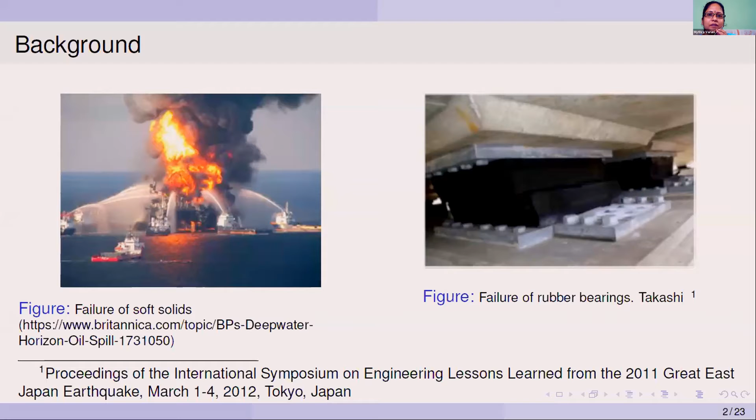So in this presentation, we'll focus on finding the onset of damage in quasi-brittle soft materials. All materials cannot be classified into entirely ductile or entirely brittle. Some brittle heterogeneous materials such as rock, concrete, ice, ceramics, various composites, and some soft materials like synthetic hydrogels, elastomers, and biological tissues come under this category of quasi-brittle materials.

This strain softening is basically the degradation in material stiffness with increasing strain and is observed at a continuum level in damaged quasi-brittle materials.

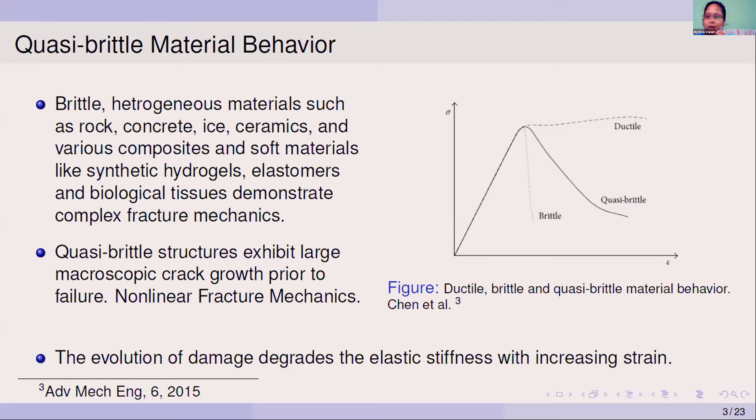So let's now turn to the modeling of this damage onset in these quasi-brittle materials by addressing their constitutive behavior of nonlinear brittle elasticity. As we know, a hyperelastic constitutive model is developed to describe the nonlinear elastic response and derives the stress-strain relation for the elastic material from a strain energy density function.

Traditional hyperelastic models are aimed at describing the intact material behavior and allow for unlimited increase in strain energy. However, we know that no real material can accumulate unlimited strain energy, and materials start to exhibit instabilities after reaching a certain critical value of strain energy, and they fail eventually.

The two approaches used in literature to model bulk failure are the strength of materials approach and the continuum damage mechanics approach. According to the strength of materials approach, global failure is said to have occurred when a local failure criterion is satisfied at a material point. The continuum damage mechanics approach allows for global failure modeling and is based on the introduction of internal damage variables into the constitutive theory.

We know that these internal damage variables follow a certain damage evolution equation. A physically motivated alternative to this continuum damage mechanics approach, which models the failure related with bond rupture, called the virtual internal bond method, was proposed by Klein. This virtual internal bond method is a multi-scale method which mixes atomistic and continuum descriptions.

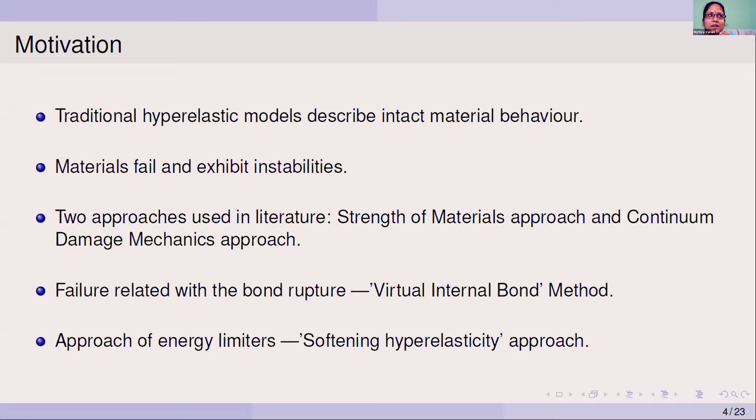This idea of softening hyperelasticity is essentially an extension of the description for two-particle separation to a larger number of particles in a representative volume of the continuum. The number of physical particles in the representative volume is limited, so the average bond energy of these particles is limited. Consequently, the strain energy density on the macroscopic scale should also be limited.

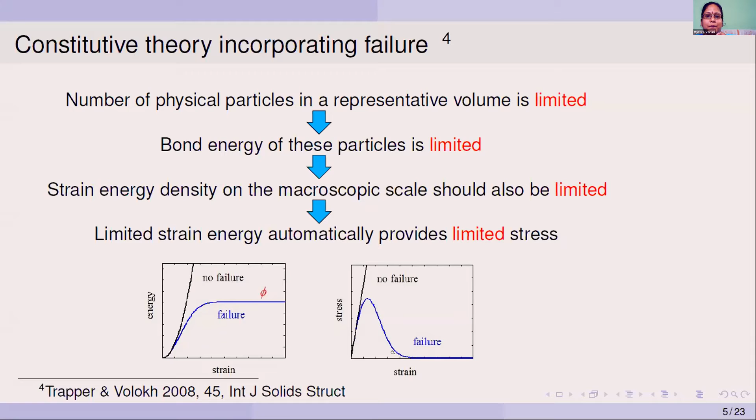This leads us to our objective of developing a constitutive theory incorporating failure using the energy limiter approach, and predicting the onset of localized cracks by examining the mathematical condition of strong ellipticity.

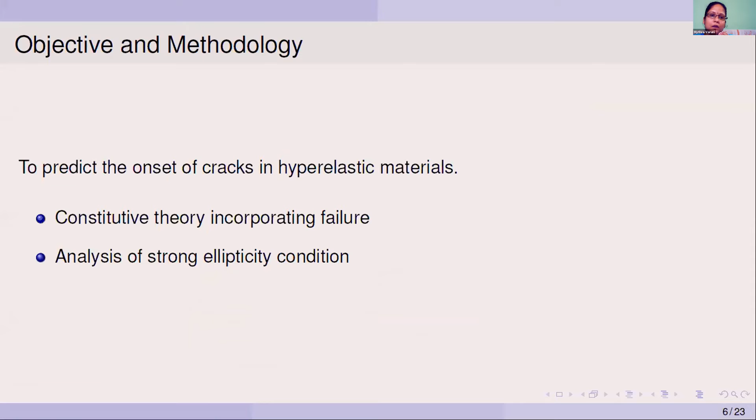The onset of localized damage occurs when the condition of strong ellipticity is violated. Here we associate the loss of strong ellipticity of the incremental initial boundary value problem with the onset of localized damage. These are the incremental equations in Eulerian form, and equation 2 gives the balance of linear momentum.

Here y tilde is the incremental displacement vector superimposed onto the displacement y, and sigma tilde is the incremental Cauchy stress tensor. Equation 3 gives the balance of angular momentum. Here L tilde is the incremental velocity gradient.

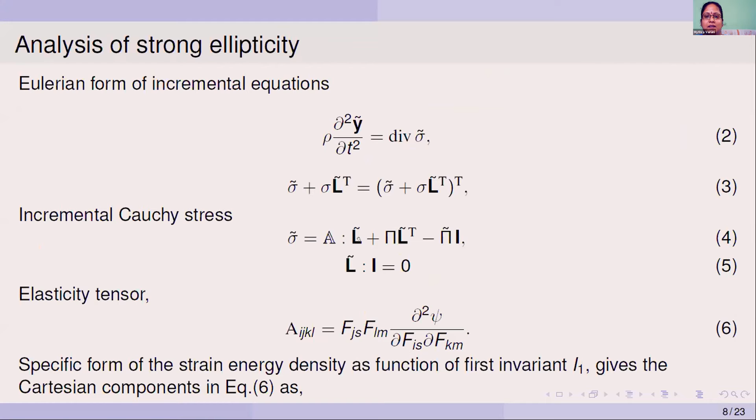Then we substitute this incremental velocity gradient back into the equation for the Cauchy stress tensor, and we obtain the incremental Cauchy stress. Then we substitute this incremental Cauchy stress tensor and y tilde from equation 8 back into the equation for balance of linear momentum, equation 2, to obtain equation 9.

Here the term capital lambda, which is a function of the unit vector in the wave propagation direction S, is called the acoustic tensor, given in its component form by equation 10.

Then we plug this incremental velocity gradient L tilde back into the incompressibility condition, equation 5, and we obtain this orthogonal relation between the unit vectors R and S.

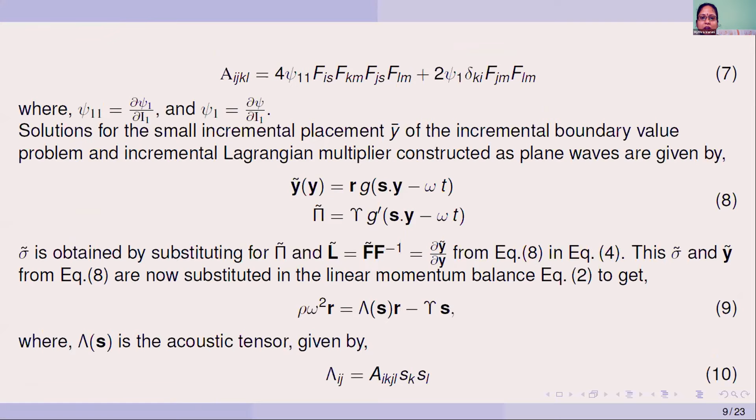Now we go back to equation 9 and take the scalar product with the unit vector in the wave polarization direction R, and using this incompressibility condition, we obtain equation 12 for the wave speed. This wave speed is always positive for the condition of strong ellipticity to be satisfied.

So this condition of strong ellipticity is violated for the vanishing wave speed, that is when this rho omega square becomes 0. This physically means the inability of the material to propagate a superimposed wave, as crack tends to localize in a direction perpendicular to a possible wave direction.

When the specific form of this strain energy psi is a function of only the first strain invariant, we already calculated the incremental form of this elasticity tensor, which we plug into this acoustic tensor to obtain its incremental form. This is the tensorial form for the acoustic tensor.

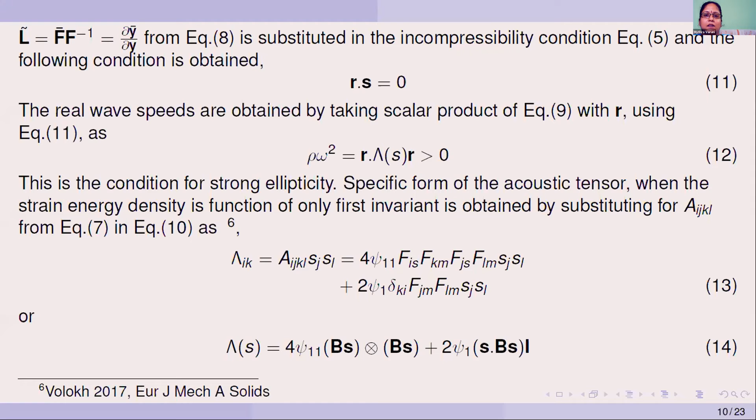And now we substitute this acoustic tensor back into equation 12, which is this condition of strong ellipticity, and we obtain this specific form for the speed of plane wave.

This equation is valid only for incompressible materials and when the strain energy density is a function of only the first strain invariant. In general, for a compressible case, the expressions for incremental Cauchy stress tensor and the elasticity tensor in component form are as shown here.

This is a specific form for the speed of plane wave when strain energy density is a function of only the first and third strain invariants, I1 and I3. Here these psi33 and psi3 are the second and first derivatives with respect to the third strain invariant I3, and psi13 is a mixed derivative with respect to the first and third strain invariants, and this J is the square root of the third strain invariant I3. So this is the equation for the wave speed for a general compressible case.

Next we analyze the onset of localized cracks in rubber bearings under combined compression and shear, as rubber bearings used for seismic isolation are often compressed by the weight of the supported structure and are also prone to large shear deformations during earthquakes.

In order to describe the intact material behavior, we use this incompressible Yeoh model for the strain energy density W for intact material behavior, and we obtain these model parameters by matching this model response to the experimental data of natural rubber vulcanizite in uniaxial tension as obtained by Hamdi and his colleagues.

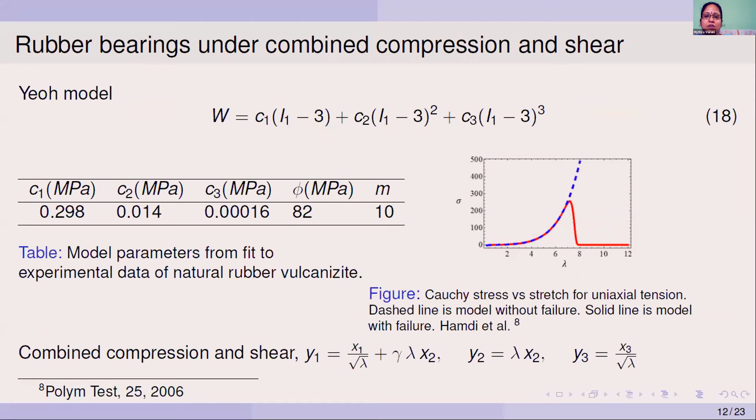Here this gamma is the amount of shear strain, and this lambda is the amount of compressive stretch. So from this equation of motion, we calculate the deformation gradient F, and from which we get the left Cauchy strain tensor B. Then these are the specific forms for the unit vectors in the directions of wave propagation and wave polarization. Here alpha is the angle in the x1, x2 plane, and this particular form is chosen for these unit vectors such that the incompressibility condition r dot s equal to 0 is satisfied.

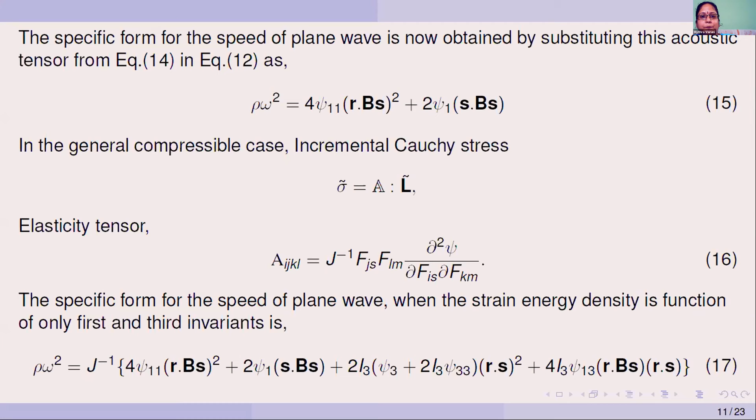Now we plug in these specific forms of R and S and the calculated left Cauchy strain tensor B into this equation for the wave speed in an incompressible material, and we obtain this equation number 20. Now we plug in for the derivatives of the strain energy density incorporating failure in terms of the derivatives of the strain energy for the intact material behavior, W11 and W1.

And we get the split conditions where material instability sets in, F1 equal to 0 and F2 equal to 0. Here this F2 is the exponential function, and we can see that it does not depend on alpha, which is the orientation of the superimposed wave. And this F1 depends on alpha.

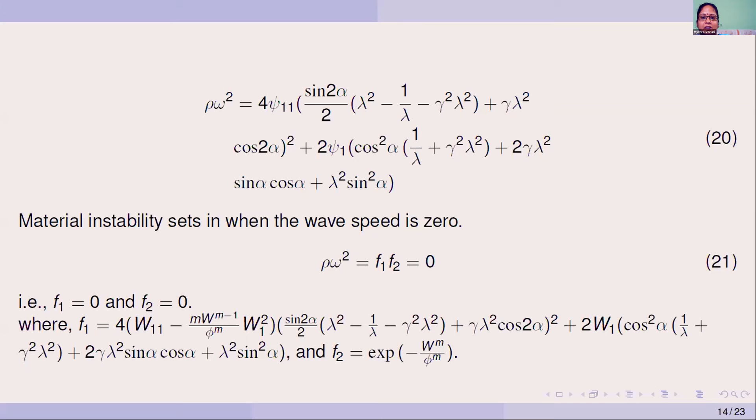And here we consider this F1 to be an implicit function of the shear strain gamma and orientation of the superimposed wave alpha for varying compressive stretch lambda. And we plot these split conditions graphically as shown in this figure on the left.

Here these horizontal lines represent the F2 equal to 0 curve, and these other three curves are for F1 equal to 0. And we can see that the lowest amount of shear strain occurs at an angle of alpha of 90 degrees and 270 degrees. That is to say that crack localizes in a horizontal direction, or x1 axis.

And these three sets of curves are for three different values of compressive stretch lambda: 1, 0.7, and 0.4. And we can see from this figure that as we increase the compression, that is when lambda equal to 0.4, the critical shear strain magnitude is the highest.

And this figure on the right shows the shear stress versus shear strain curve for different compressive stretch values, and these limit points show the loss of strong ellipticity. And we can see that with increase in compression, the onset of damage is delayed.

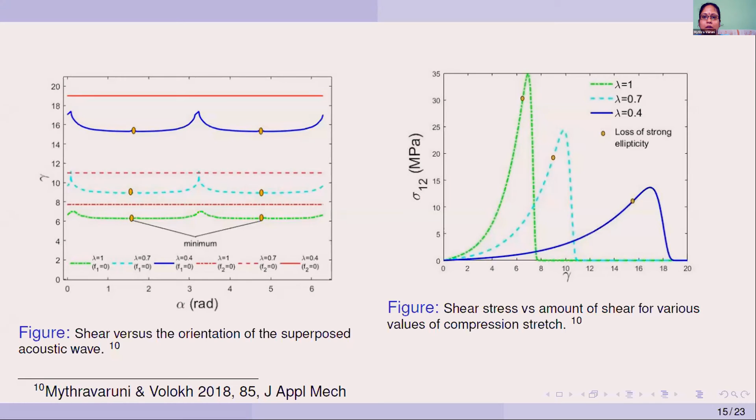Another problem of practical interest is to study the onset of damage in a sheet of aneurysm material under equibiaxial tension. To describe the intact material behavior, we use the reduced Yeoh model, and we get these model parameters from the fit to experimental data of abdominal aortic aneurysm material in uniaxial tension as obtained by Raghavan and Vorp.

This figure shows the Cauchy stress versus stretch for the model and experimental data. This blue line is for the model, and these red triangles represent the experimental data. And this equation is for equibiaxial tension.

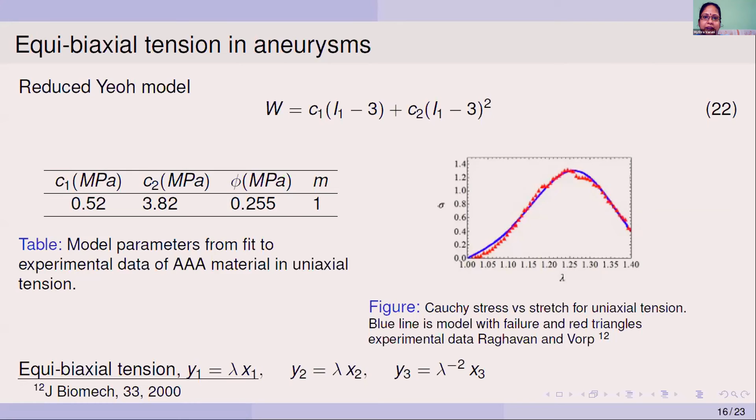For an incompressible material, by following the same procedure as for the case of rubber bearings, we arrive at these split conditions. Here F2, the exponential function, does not depend on alpha, and F1 also does not depend on alpha in the case of equibiaxial tension of an isotropic material.

We also see that this F1 is always positive under tension, so the condition of strong ellipticity is violated only when this exponential function F2 becomes 0. We show this convergence of the exponential function in this figure. Here this blue star denotes the critical amount of stretch that is associated with the onset of localized damage.

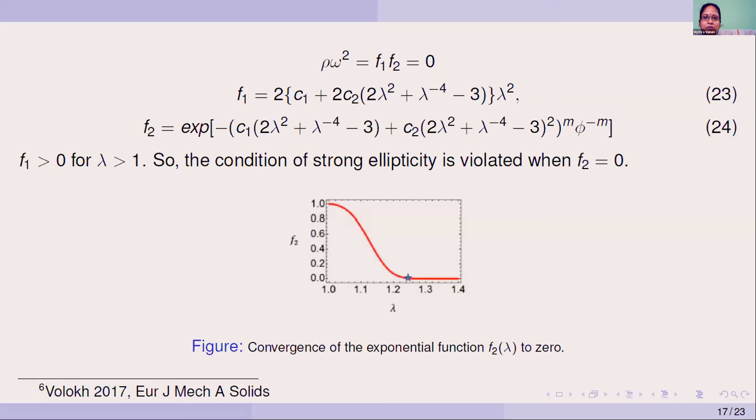In both problems that we considered, we imposed an incompressibility constraint. So let's now relax this incompressibility constraint and study the onset of damage in a sheet of slightly compressible material, when this material is subjected to different cases of uniaxial tension, shear strain, and equibiaxial tension.

This W is the strain energy density for the intact material behavior. Here I3 is the third strain invariant, and this capital K is the bulk modulus. This value of the bulk modulus is obtained such that the stress strain response for this slightly compressible material and for the incompressible material coincide.

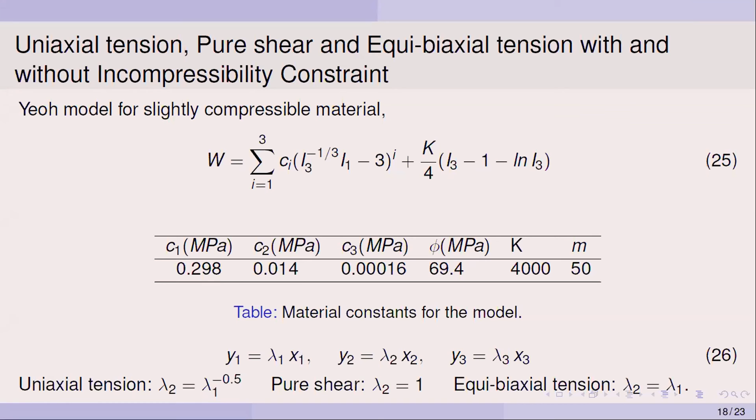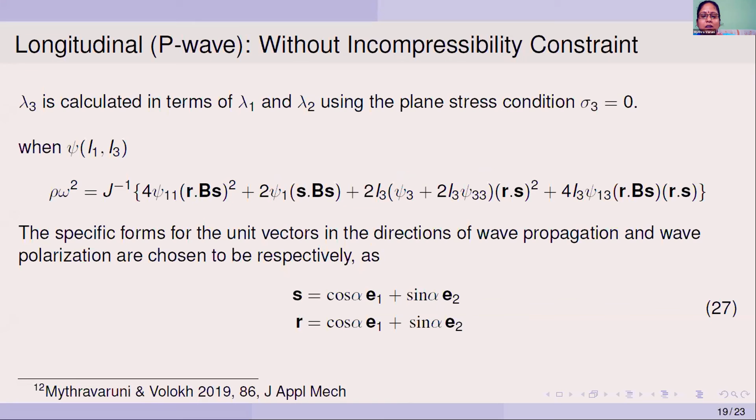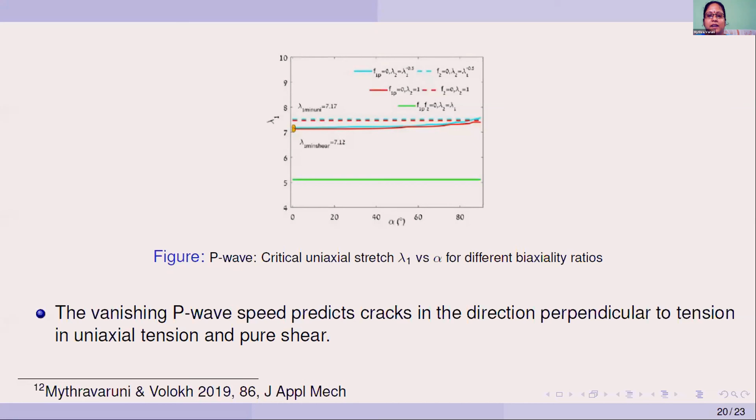the localized crack does not have any preferred direction, whereas in the case of uniaxial tension and pure shear, this critical value occurs at alpha equal to 0 degrees, meaning that the crack localizes in a direction perpendicular to the applied stretch lambda 1. And when we impose incompressibility constraints, we obtain these

It should be emphasized that imposing incompressibility constraints rules out the longitudinal waves, and we lose the possibility to predict the cracks associated with these longitudinal pressure waves. With this, I would like to conclude my presentation. Thank you very much for giving me this opportunity.

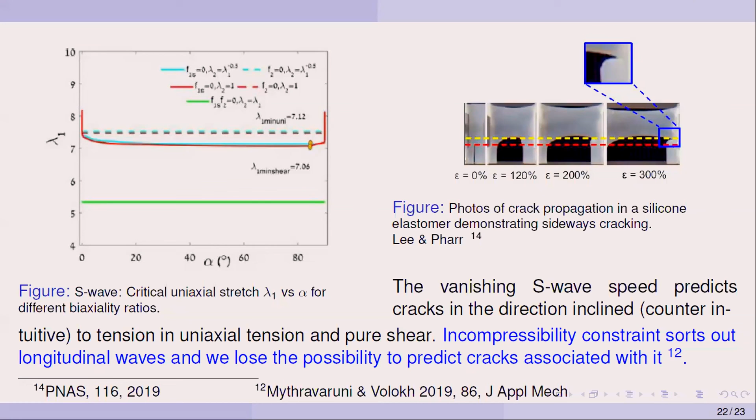In the meantime, I have a question. If you go back to equation 1, it was on slide number 7, I think. I feel that that's the equation that I should understand. So could you just help me understand what's the motivation behind this form of the strain energy psi?

Here we actually introduce this energy limiter phi, which is the critical failure energy. This means we impose a limit on the strain energy that can be stored in the hyperelastic material, and we choose this gamma function and this particular form so that...

Is there any broad similarity between this approach and the more popular phase field models for damage or fracture? Is there some similarity in terms of introducing additional parameters to incorporate damage? Because I'm wondering, where does localization come from? In phase field models, often you see some explicit length scale, which tells you there could be localization. In this case, I'm unable to see a length scale, at least without understanding what phi and M are.